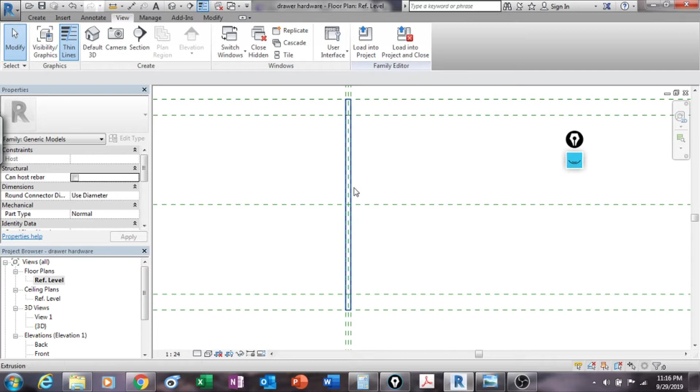You can rotate this thing, but I think it's not a good idea. Maybe it is, okay, let's see. You can try to rotate it. It's your choice, you can rotate it here and create it horizontal, or you can make it vertical, and when you take it into the family, create a nested family, as we're gonna learn in a second.

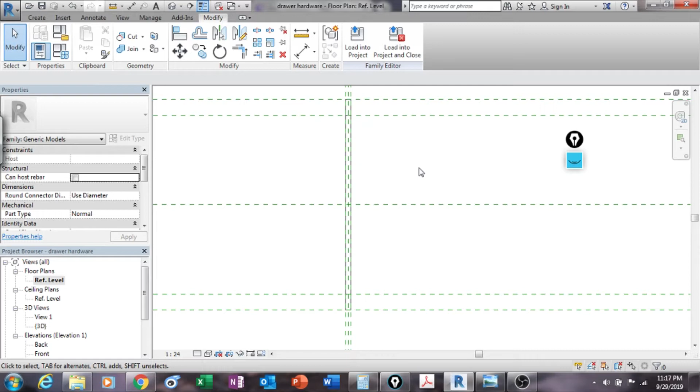You can rotate it there, it's your choice. Since the drawer handles are all the time horizontal, I think it's best to just create it horizontal. So let's see how this is possible. I'm gonna select this thing, go to rotate, pick a 90 degree, and then rotate this one. That seems to be working fine.

So what I'm going to do is the inverse thing. Remember, last time we aligned the geometry to the reference plane. Now I'm gonna align the reference plane to the geometry.

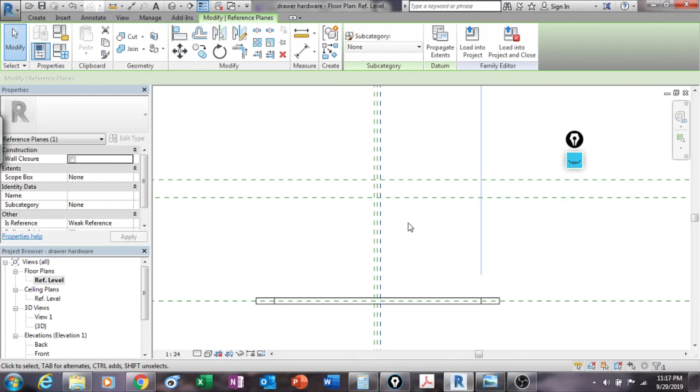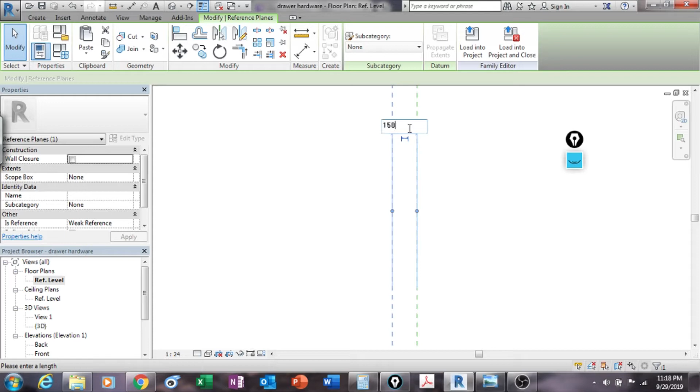No, I'm going to make this, we said this is going to be 300, right? So I'm going to make this 150. 150. And I want to make this also 150. 150. Okay.

So now I'm gonna take this in here. Oh, cancel, it's not allowing me to. I have to actually edit the profile.

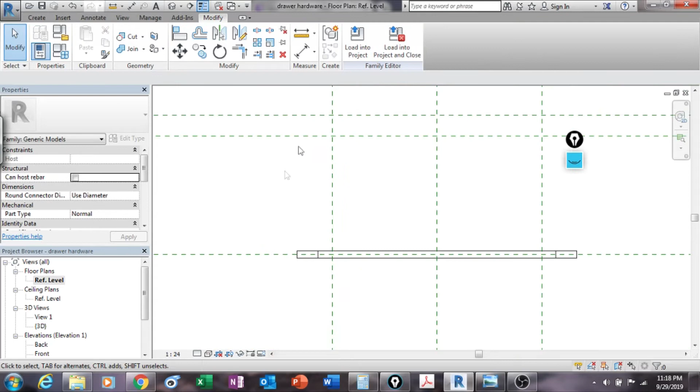So this one, I don't need it here. This one I'm going to align here for future reference, and also this and here for future references. Yeah, this not needed actually, and this not needed actually.

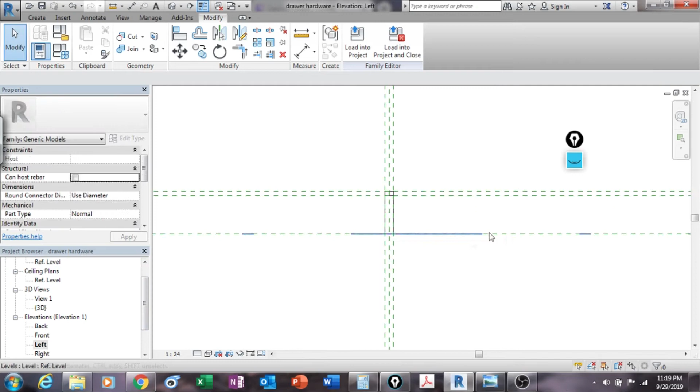So if we go to the left, I believe this time was on the left. Sorry, now the front. This is what I'm fine. Remember, it didn't allow me to do this one, to put it right here. Sometimes it's one solid piece, like a box, it would allow you to do it. But since it's a little bit more complex, it just won't allow you to do it.

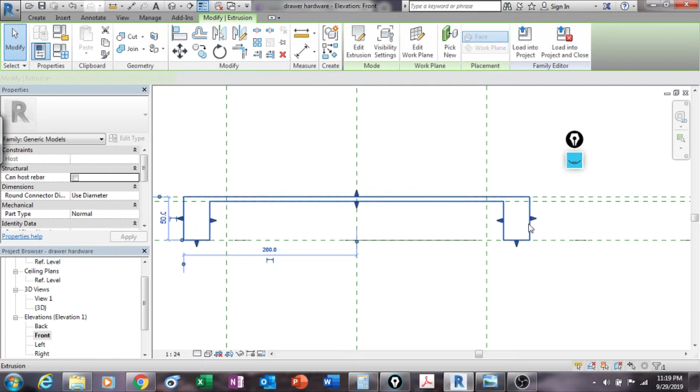What you need to do is edit your extrusion, right? So let's go for it. Select this thing, and I'm gonna go edit extrusion. Let's see if we can make this out of one time.

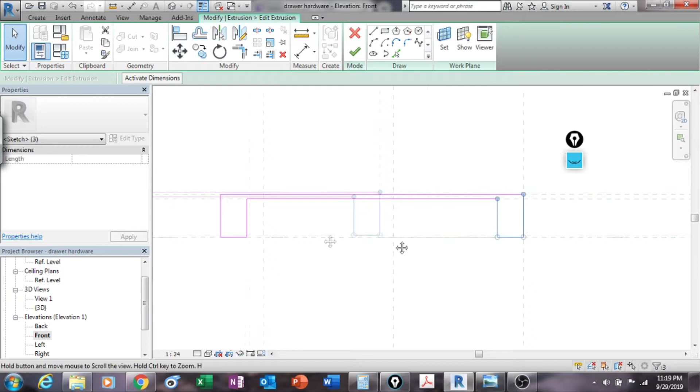I'm gonna hold down Control key, and I'm gonna hit move, and let's see if this thing actually moves to where I want. Yeah, it seems to be working. And we're gonna do the same thing around here. Control to add selection, hit the move tool, and make sure I go there. Seems to be working.

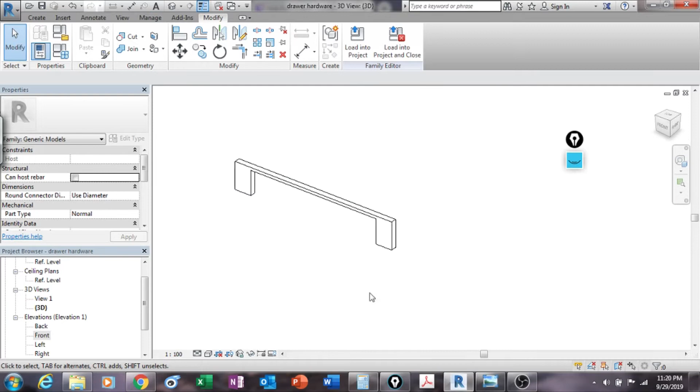Here again, and I think we go here, just have this one horizontal, right? Let's go to the top view, reference plane, and I think now it's horizontal. Okay, so hit save, and now this is the drawer hardware.

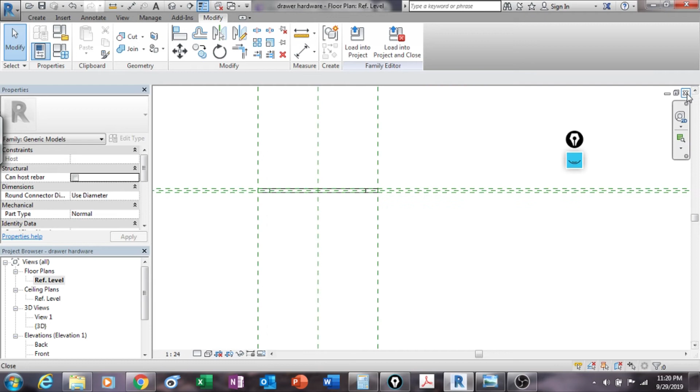Okay, so I'm gonna save this thing, and I'm gonna close this thing. Close this thing. Okay.

Very good. So now, as you can see, I have a pretty good library of elements that are going to combine to create different hardware, as different vanities.

I still wanted to do the leg, so let me do the leg, so we are done with our pieces. So 2, yes.

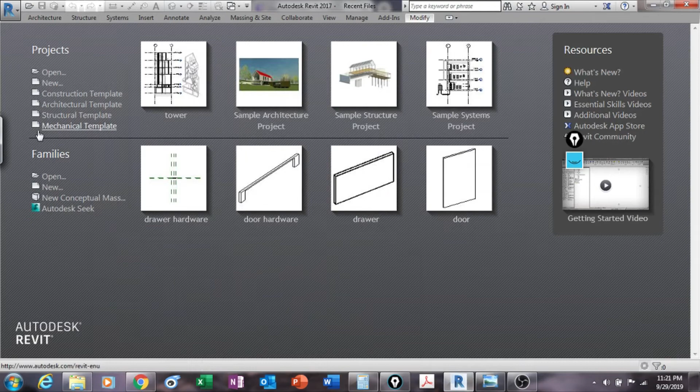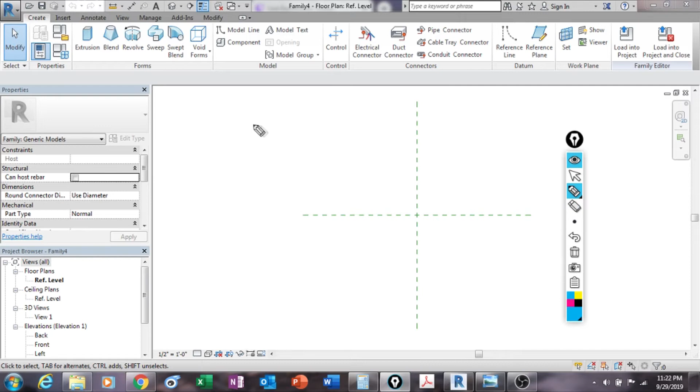Good, anyway, let's go for it. So new family, I also want to use a generic model. Okay, so I'm gonna hit the leg. The leg I'm gonna make it 2 by 2 by 2, and the top, so maybe like this. So maybe the top I'll make it 20 by 20, and this is 15 by 50.

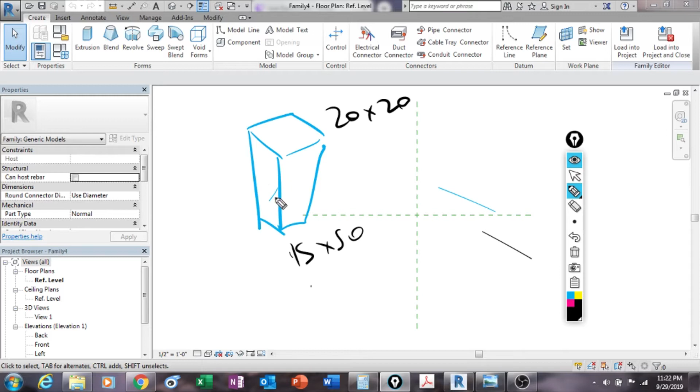I won't be able to use a blend because, as you can see, this I need to be flat. If I make a blend, this is what blend would do for me. So all of the sides are going to be slanted, none of them are going to be flat.

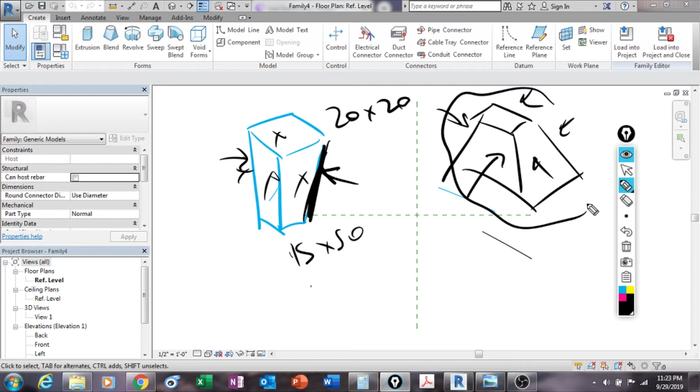So for that, I'm going to use an extrusion, okay? Because I want this side to be flat, this side to be flat, this side to be flat, the other one also to be flat, and the only one I want to be slanted is this one right here. So for that reason, I won't be able to use a blend, just a simple extrusion, I think, is going to make it for me.

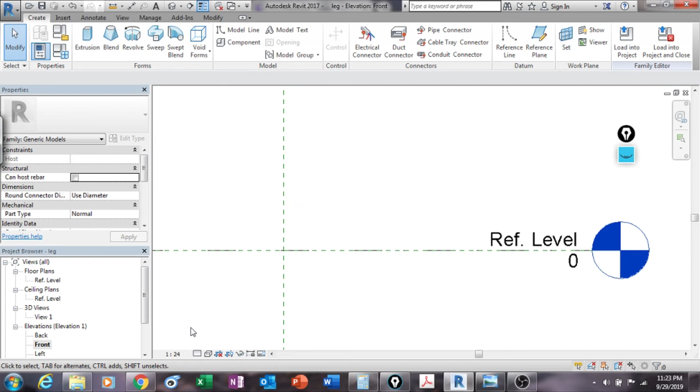Reference plane, okay, let's save this thing before we start working. I'm gonna call this leg. Let me go here to the front. Change this to millimeters. Change the annotation scale and start working with the thing.

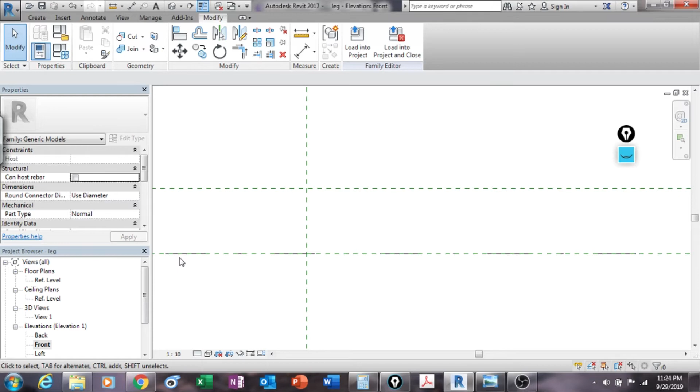I'll create a reference plane of 100 offset from the floor. And then 10, and then yes, a 10. I need a 10 here. And a 10 there. It's a bit thin, right? Anyway. Okay.

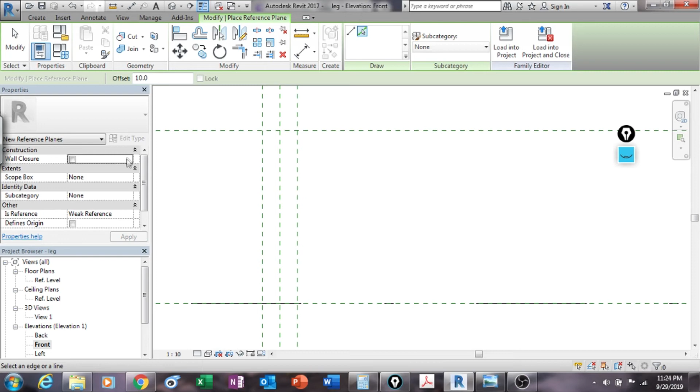I need 5 also. From this, okay, so that's going to be my thing.

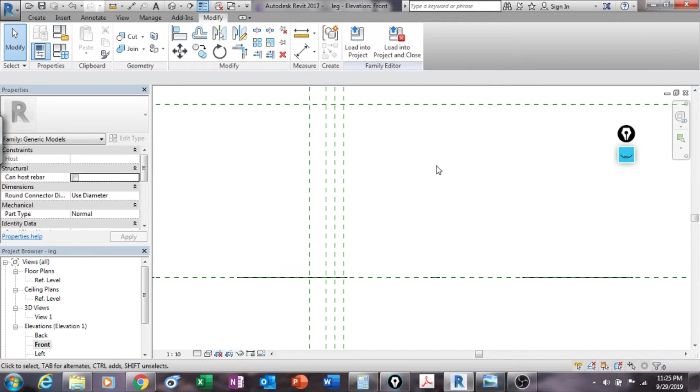So once I'm here, I'm just going to draw it. Create extrusion, and I'm going to draw this thing from here to the floor, right here, and finish it right here.

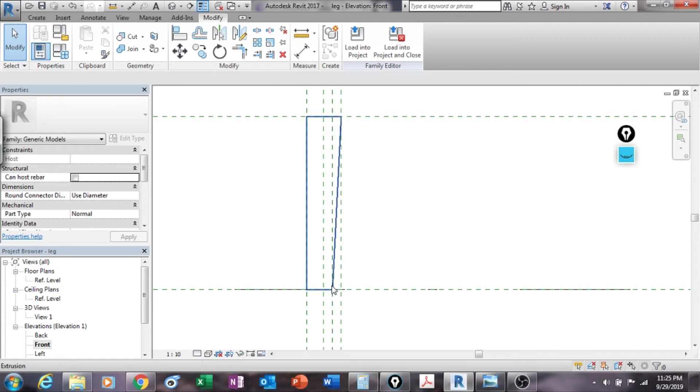Set this thing. And this goes to the floor, no need to lock to the floor. Okay, so that's a little advantage. Go to top view. I need 10 and 10, right?

So create 2 reference planes right there. Right 10, up and down. So now I'm going to align this.

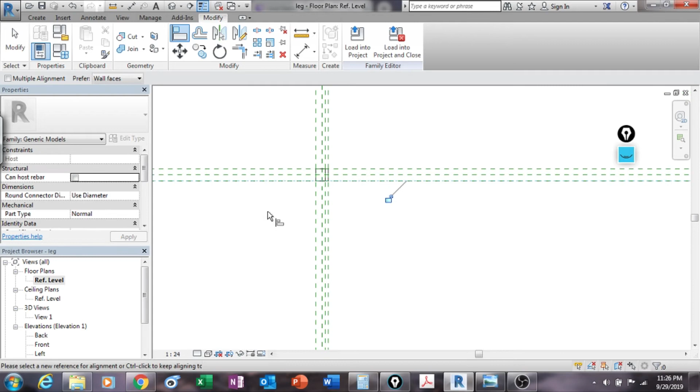I don't think I need to lock this thing. Okay, maybe in the future we'll see. Say I have my leg already here. Okay, let's say this one.

Let's go back here. Now, apart from the countertop, you need something very specific. You can create also a family for the countertop. That's also something you can do.

Now, also you can use the countertop from a Revit family, the one that comes already in the software, which is quite useful. So apart from that, and apart from the actual

How do you call this, faucet, right? That's what we call this. Apart from the countertop and the faucet, you're pretty much all set. We have every element that takes part in the composition of this vanity.

So I guess we can start building the vanity. The first thing I want to do here is build my doors. I'm going to create two doors, a door left and a door right. Okay, so that's the first thing I wanted to do.

So right now I have a door and I have the hardware separately. So now I'm going to create a new family with the door plus the handle, and I'm going to create one for the right and one for the left. So let's see how that's possible.

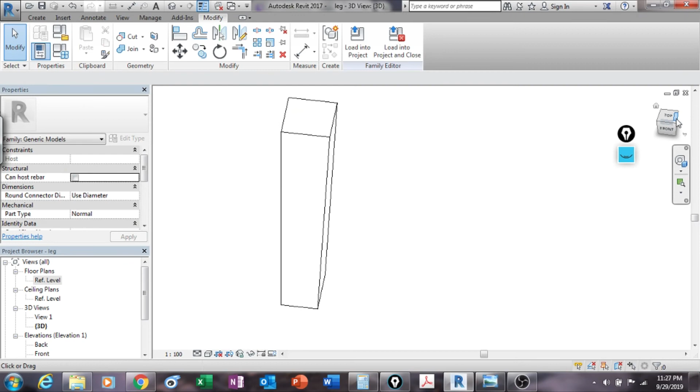Go back to Revit. I'm going to close this thing, and I'm going to start a new family. And also it's going to be a generic model. Okay, so how am I going to call this?

I'm going to call this left door. We're going to start working with the left door. Okay, so go here. Left door. So here, okay.

And now what I'm going to do is bring my simple door, and bring my handle, my hardware. I'm going to arrange it properly. I'm going to create a family with these two elements combined, which is the left door, and then we'll see how it goes. Remember, the door still needs to give me the opportunity to change width.

So I also want the handle to go along. You know, the handle, if you look at it, has a certain distance to the edge. So I want to create a family with my generic door and my handle, and I want this door to give me different width, and I want the handle to go along with that. Okay, to keep this distance a constant.

So I've started a new family. I'm going to call this left door. So what I'm going to do is bring the two families in here, the door and the handle. So how can I do that? Well, let me see.

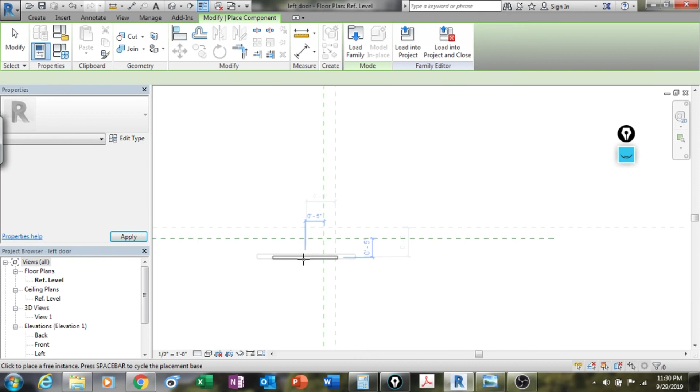So it's going to be a left door. So okay, I'm going to put it here in the center, and then I'm going to rearrange this one. So I'm right now on the left door. So I don't want this to go in the center. Okay, I want this to go. Okay, yeah, let's keep it right here in the center.

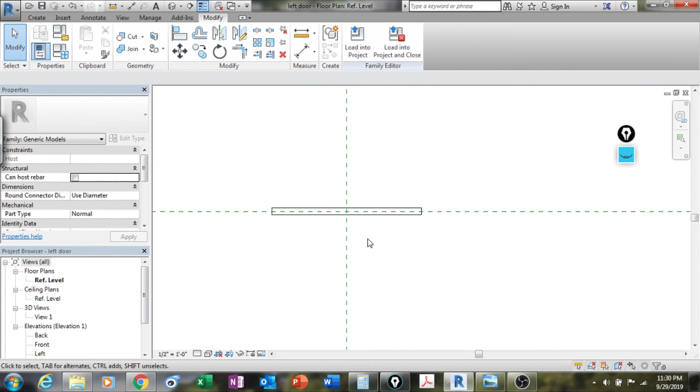So I can go here to the left door, to the door, and close this family. No need for it anymore. Okay, so to top view.

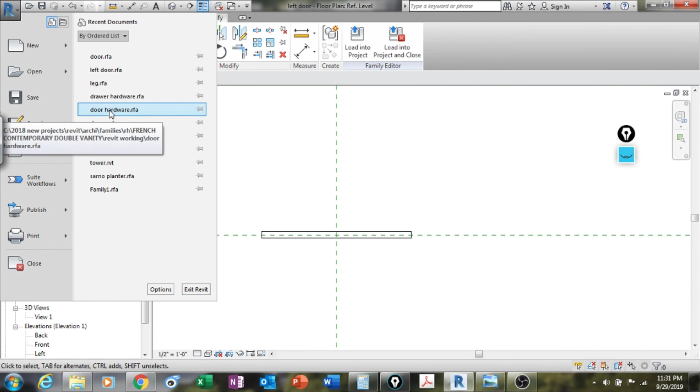So the next thing I want to do is open the hardware, door hardware. Door hardware is right here. I'll load it into the project. Once I load it into the project, I need to put it on the actual front.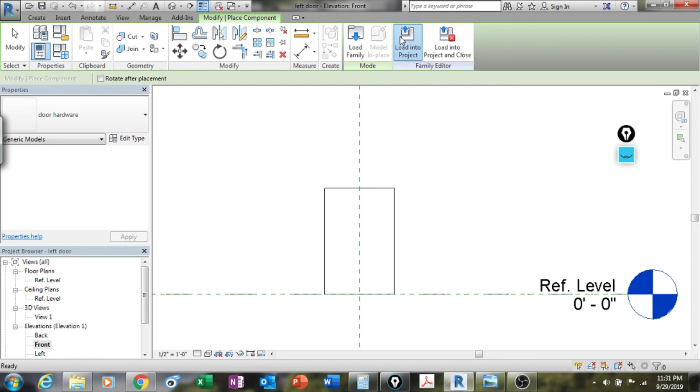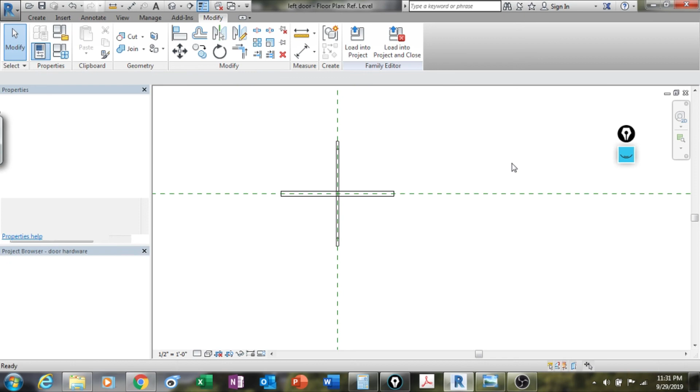Okay, I'm just going to put it here, and later on I'll figure out how to fix it. Okay, so let's go back to the handle. Let's close the handle, and let's see what we have here. Okay, so I have the door right here, then I have my handle right here that's not in the right position, in the right orientation. But we'll fix that.

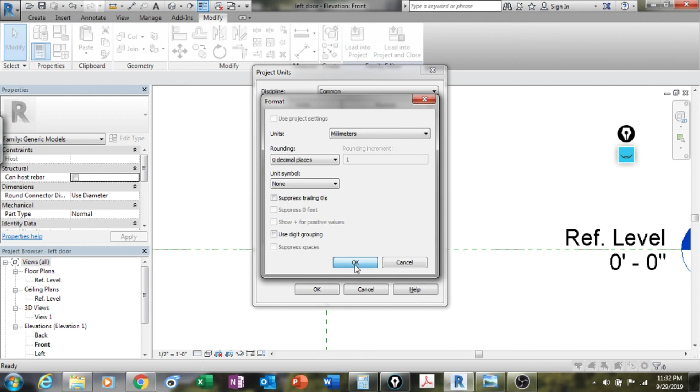Change this to millimeters. Here, okay, here, okay. So now we're working in millimeters. Let me also change the annotation scale. So that's my door right here.

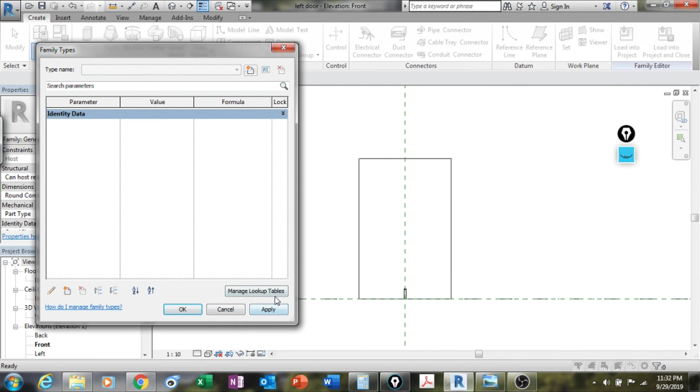Okay, great. Very good. Let's save this thing, and we're going to take a break now, and then we will continue in 5 minutes.